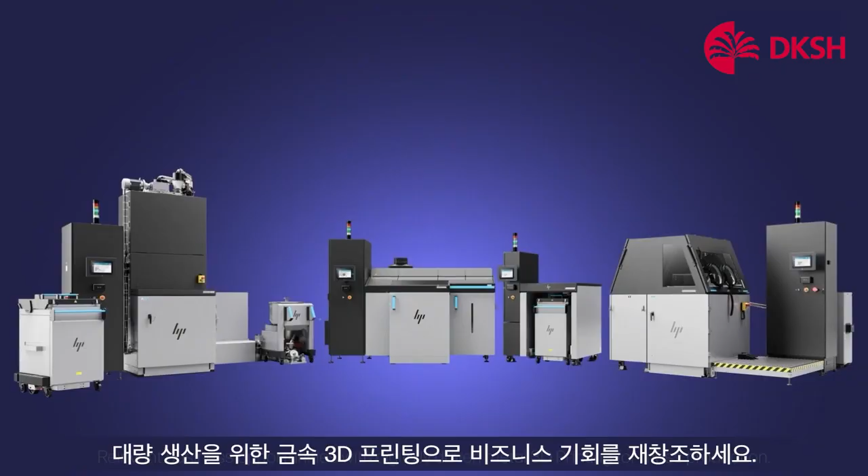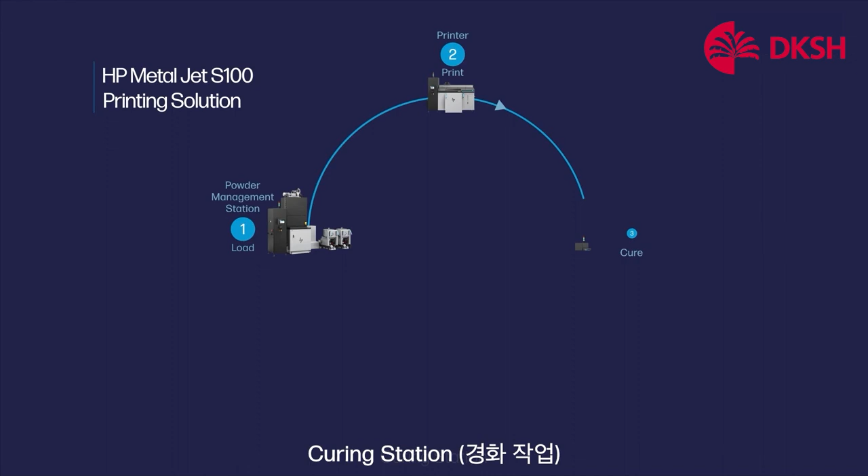Meet the new HP MetalJet S100 printing solution. Made up of 4 main hardware stations, consisting of the HP MetalJet S100 powder management station, printer, curing station, and powder removal station, along with the mobile hardware, HP MetalJet S100 build unit, and portable powder tank.

The process starts with HP MetalJet software solutions that easily and quickly prepare your printing jobs. The production process begins with metal powder preparation.

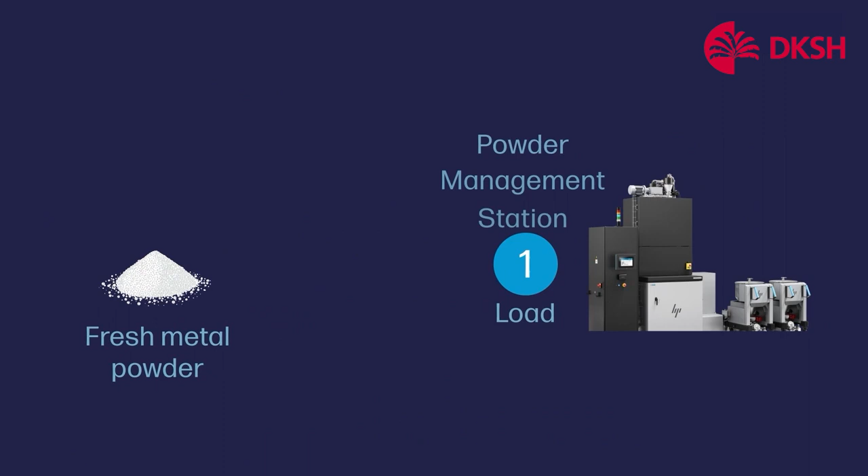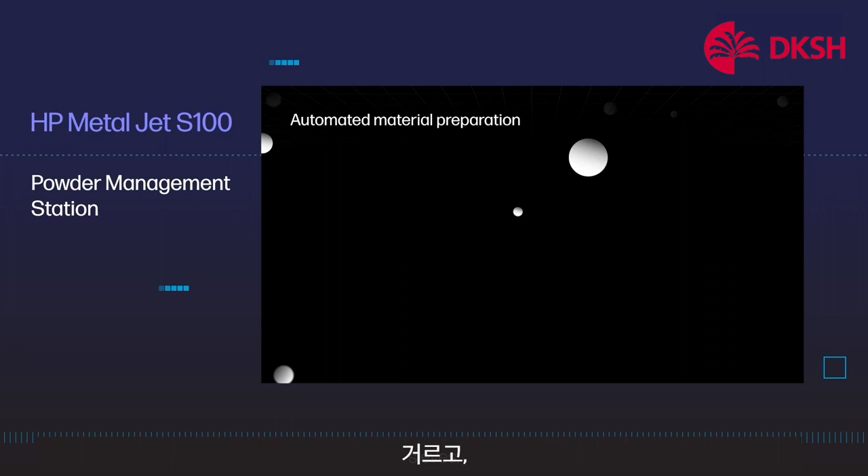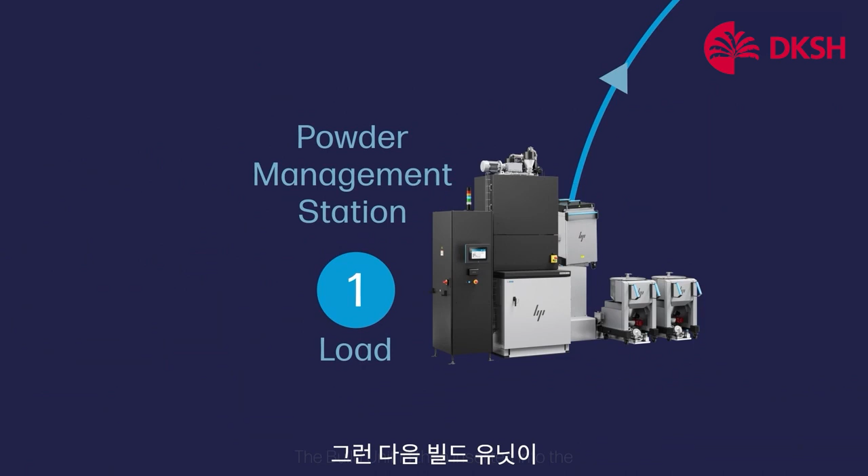The HP MetalJet powder management station automatically blends, sieves, and loads industry-standard metal powder into the HP MetalJet build unit according to your print job parameters. The build unit is then inserted into the HP MetalJet printer to start the printing process.

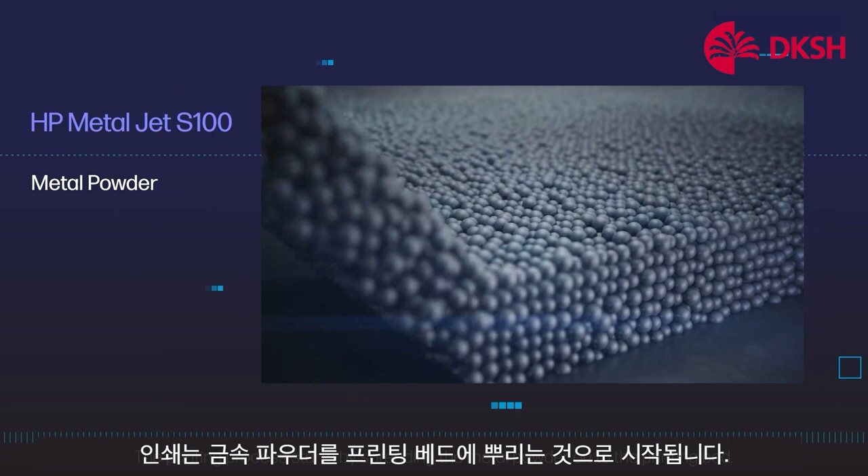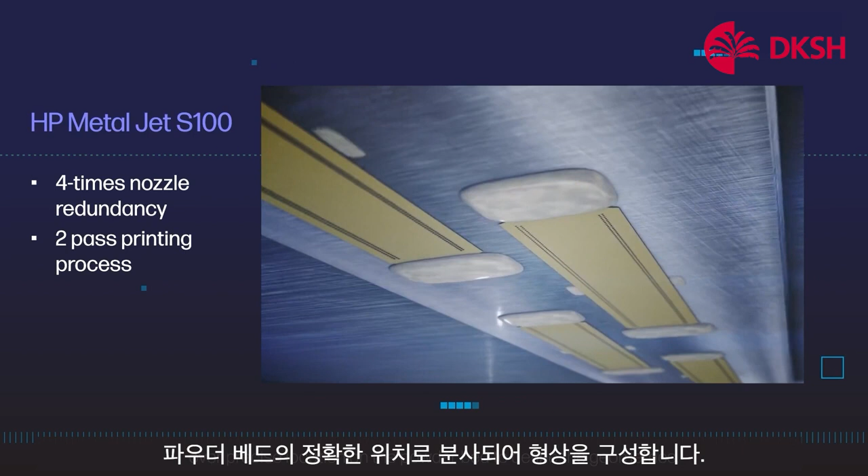The printing process starts by spreading the metal powder onto the printing bed. HP MetalJet binding agents are then jetted via the 2 print bars in the print cartridge over precise location on the powder bed to define the geometries.

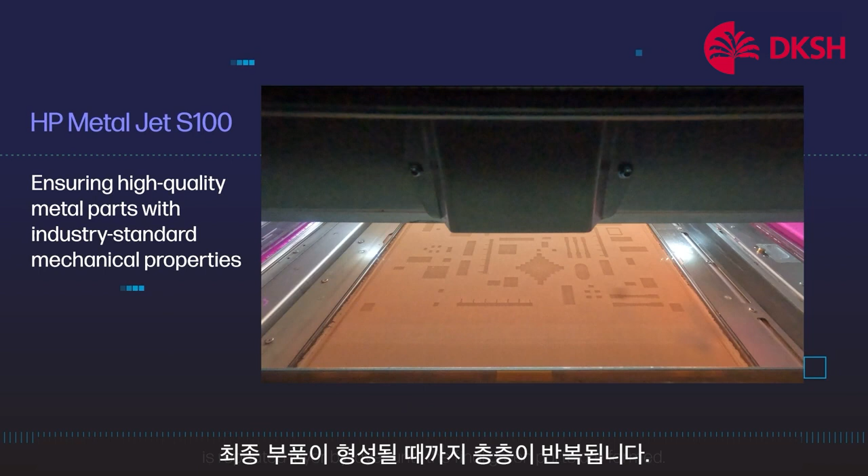The process of spreading the metal powder and jetting of binding agents is repeated layer by layer until the final green parts are formed.

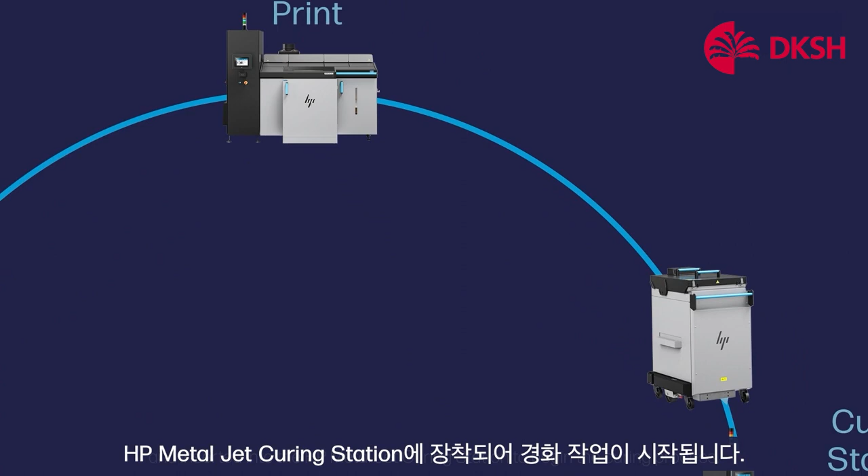Once the printing process is completed, the build unit is then removed from the printer and inserted into the HP MetalJet curing station to begin the curing process.

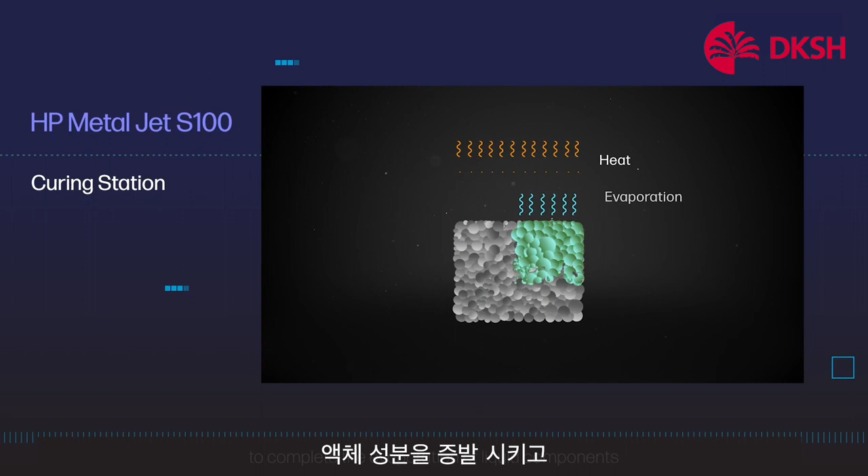In this process, the powder bed with the printed parts is heated to complete the evaporation of liquid components and cure the polymers from HP MetalJet binding agents to achieve high-strength green parts.

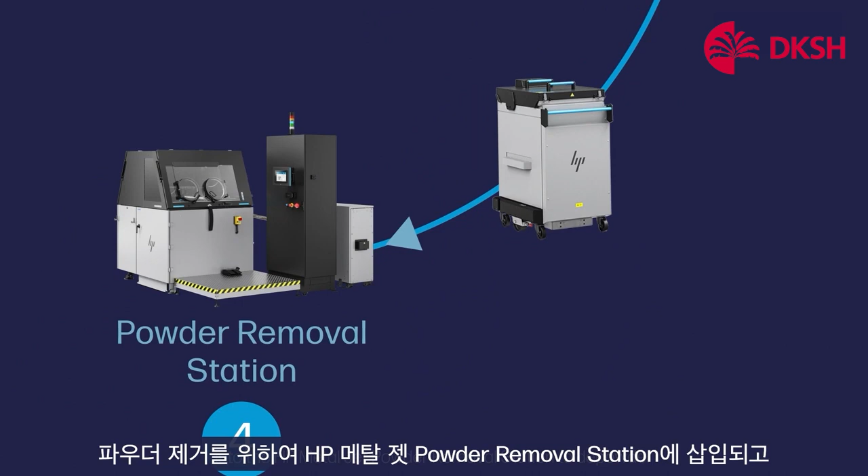After curing, the build unit is then inserted into the HP MetalJet powder removal station to depowder and retrieve the final printed green parts.

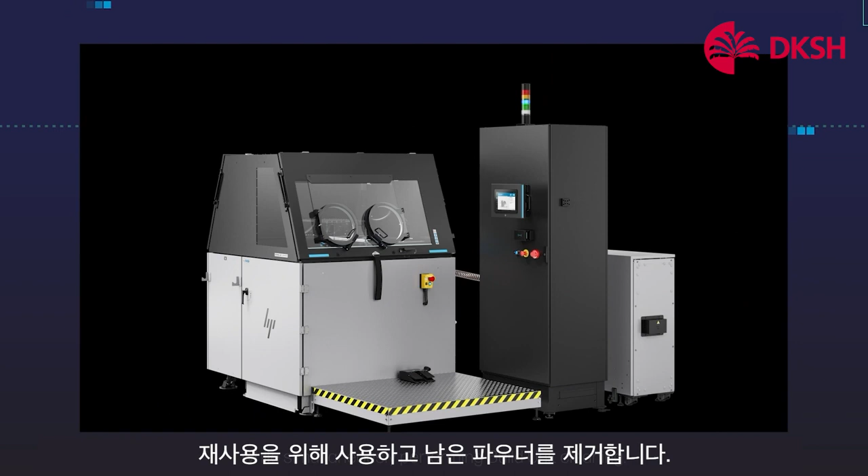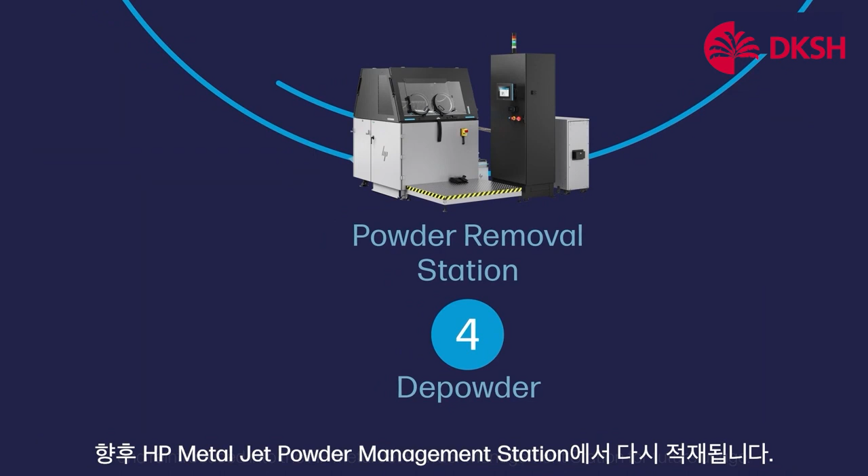The HP MetalJet S100 powder removal station automates the removal of loose powder for 100% reusability, while simultaneously performing build unit cleaning. All reclaimed powder is recovered into the HP MetalJet powder management portable tank for storage and reintroduced into the HP MetalJet powder management station for future usage.

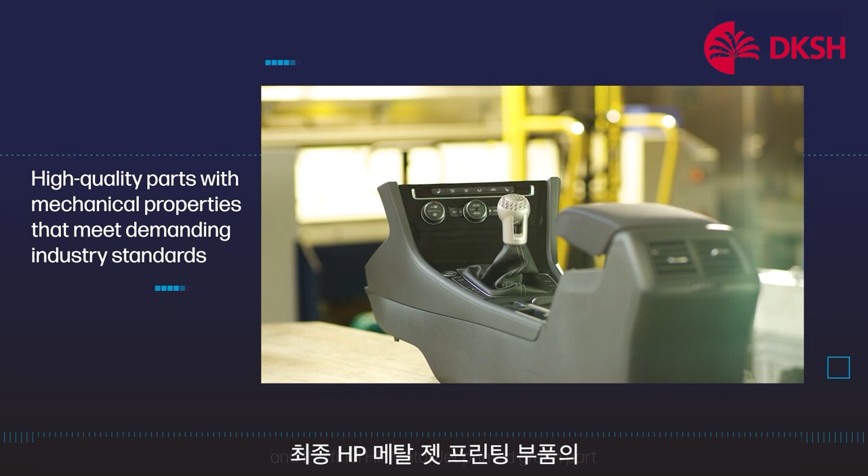The printing process is now complete, and the final HP MetalJet printed green part is now ready for sintering and finishing. At HP, we understand that true mass production extends beyond the hardware solution.

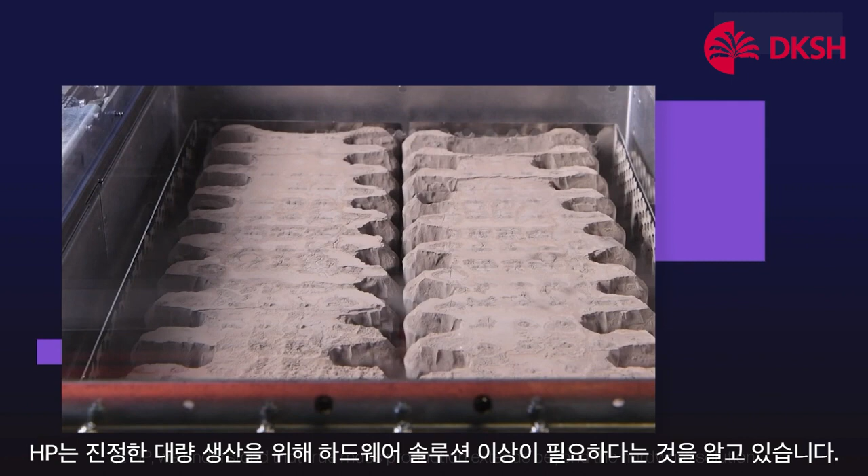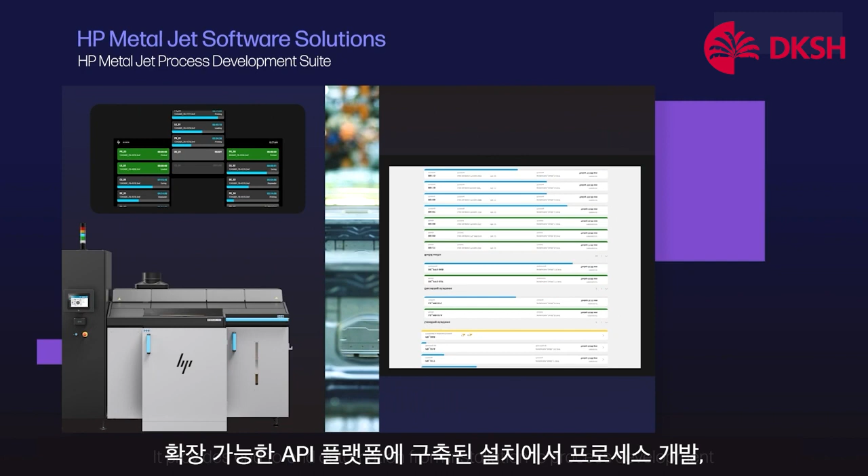As such, we provide a comprehensive suite of software and solution services to deliver an integrated, end-to-end digital solution. HP MetalJet software solutions help accelerate your process development and scale production. It provides end-to-end automation, from installation to process development to production workflow management, built on an extensible API platform.

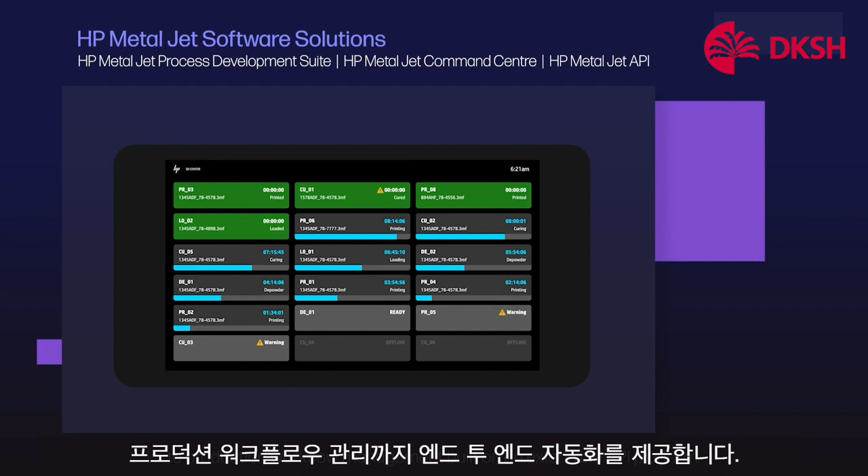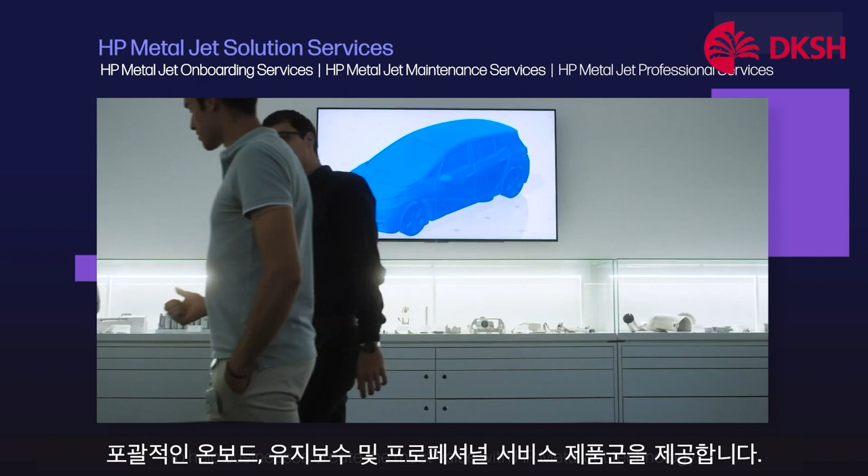To enable digital transformation for mass production, HP MetalJet Solution Services provide businesses with a comprehensive suite of onboarding, maintenance, and professional services to help businesses create the most value with HP MetalJet technology.

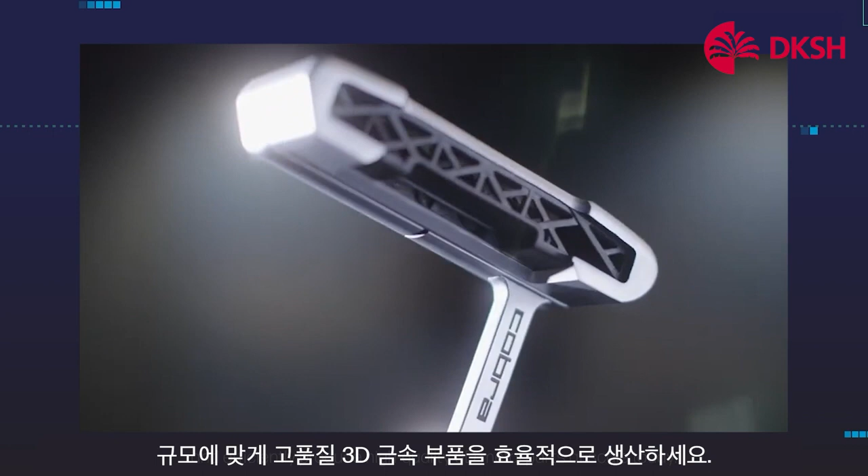Accelerate innovative designs and products and efficiently produce high-quality 3D metal parts at scale today. Get ready to experience unlimited capabilities. HP MetalJet S100 printing solution. Your success, our top priority.